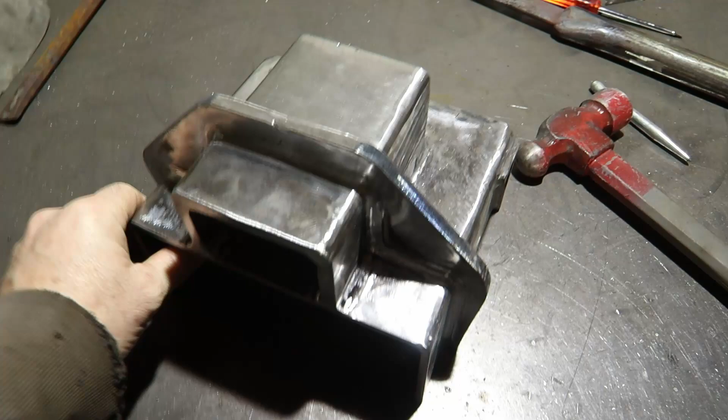In this video I will be making the bracket for the rear travel lug.

This one sits at the back end of the sled and it's also originally a cast part, but this will be made from sheet metal and welded, and I made it to look like a cast part.

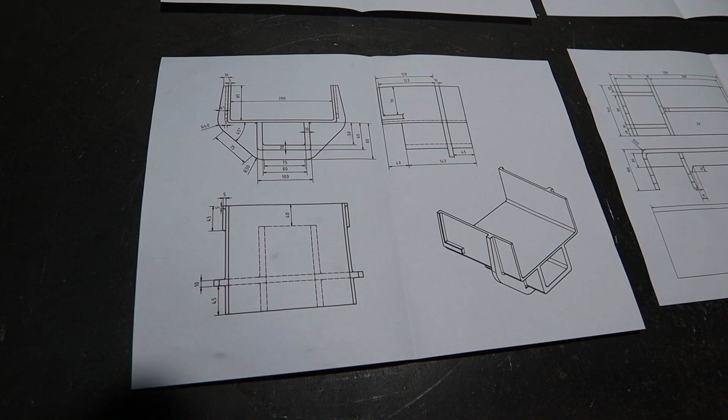I have selected the steel that I need for the parts.

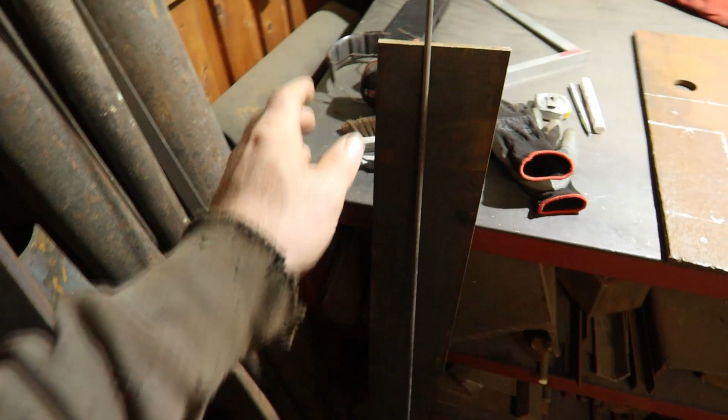This part, the flange here, I still need to make a drawing for it, scale 1:1, and I can glue it on this sheet and cut it out because it's more difficult to draw up. For the rest I have put a number on here, number 4. This is for drawing number 2. We have several parts drawn up now.

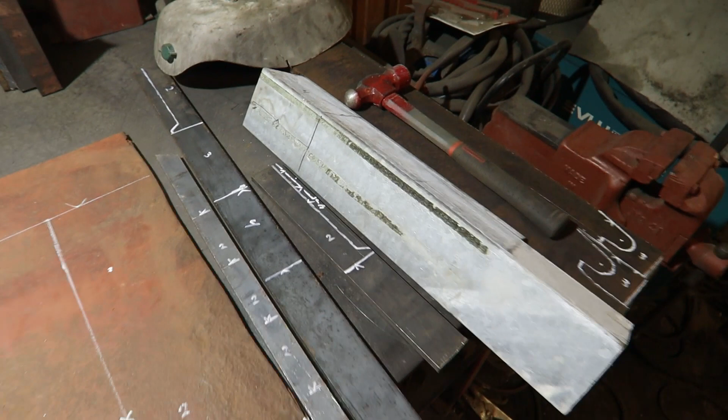This is galvanized, so it has a zinc coating, which I really need to take off because it's poisonous when welding, and also the welds will not be great.

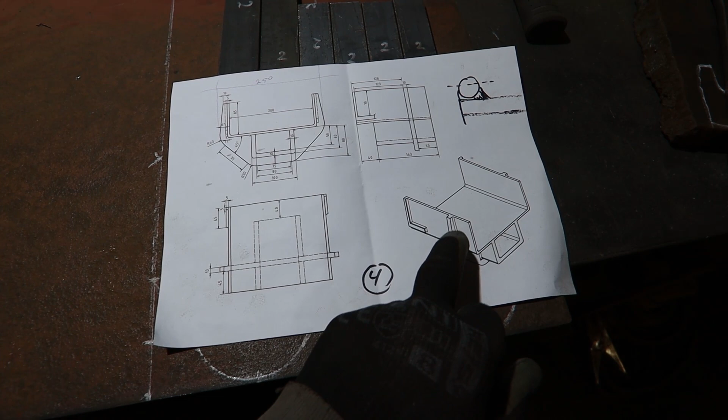For this part I'm going to make this one right now, already cut it out, but you can use a brake press to bend this sheet. Another option for bending is cutting slots in it almost all the way through and then just bending it over.

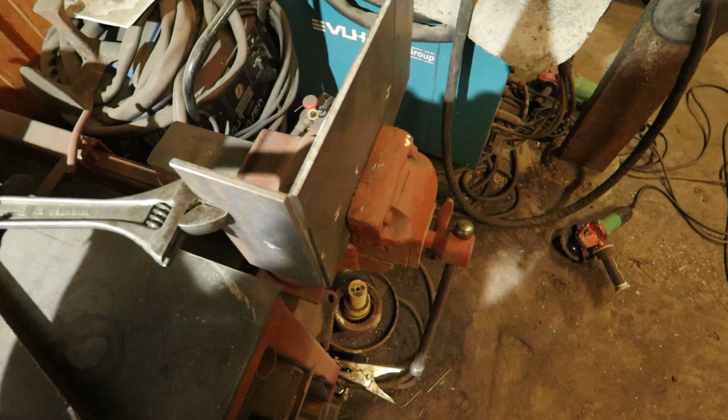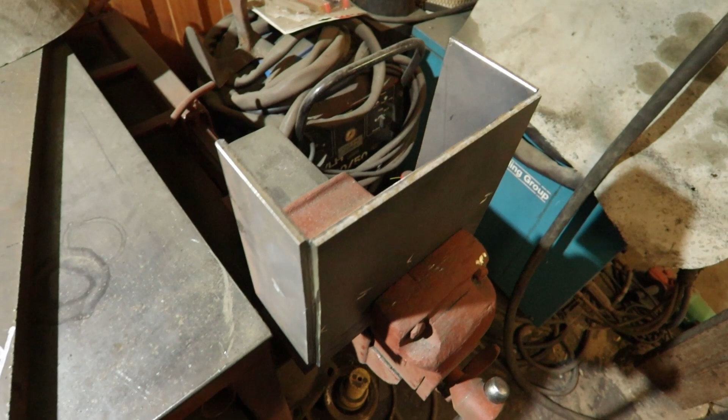Then I can weld the outside corners as well as the inside, because the inside has a little radius. It's over there, so we can use the weld seam to make that radius.

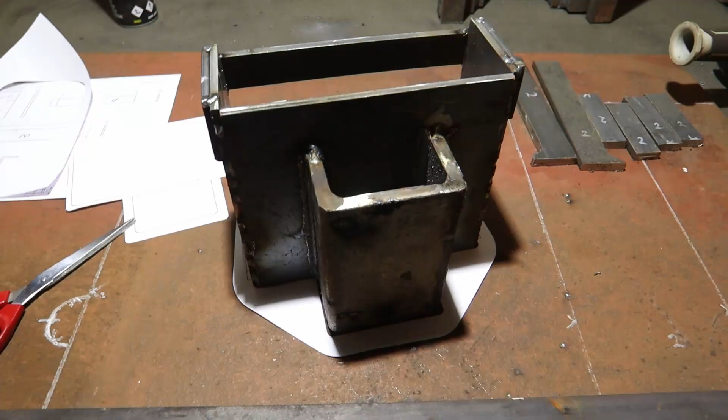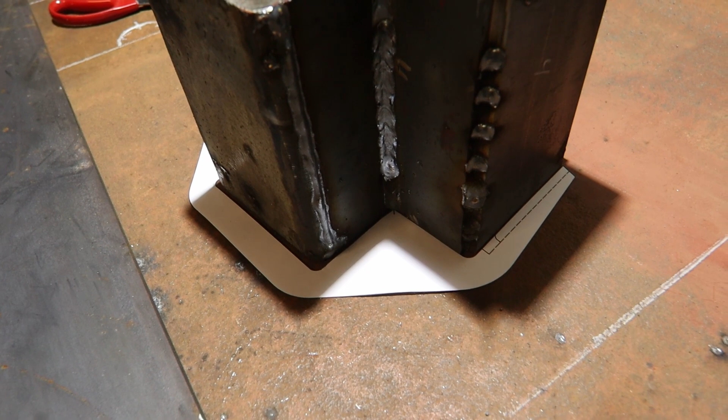For this part I made a paper cutout. Through the shade it's a bit tricky to see, but you can see it fits pretty good. I'm going to use it on a sheet of steel now and cut it out to finish this part.

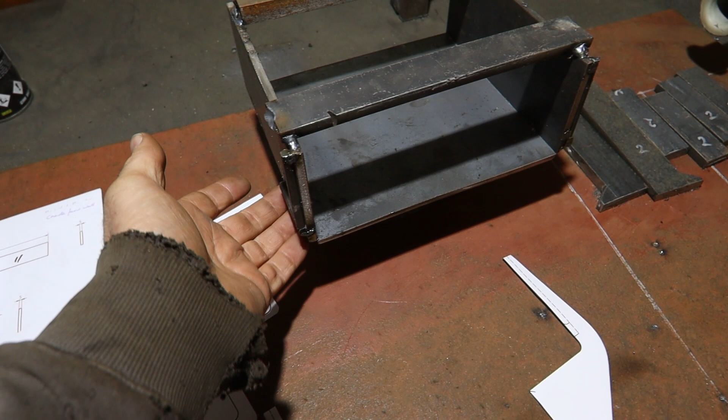On top I've placed some extra pieces of steel, some strips, for warping. When I weld this side and the inside, it's going to warp. So to prevent that, extra strips on top, and when it's cooled down I can cut it off.

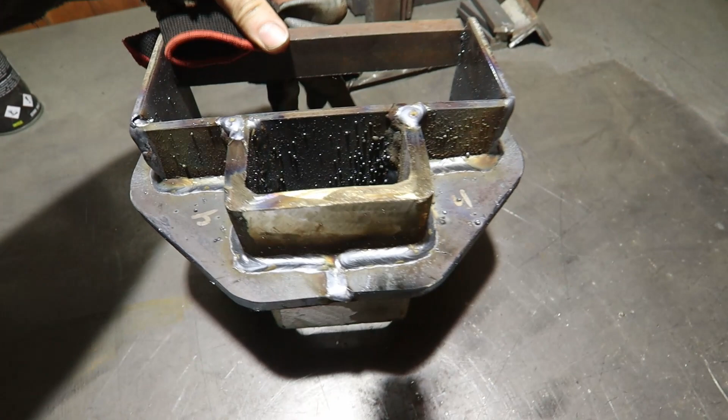This part is almost done, still hot from welding. After it's cooled down I can take off the two braces and clean it up.

All the welds have to be ground down like it's a cast part. You can see a lot of splatter on it, and that has to do with the surface of the metal - there's a thin layer of slag on it, and if you don't clean it off you get more splatter. But I have to grind it anyway, so I didn't bother.

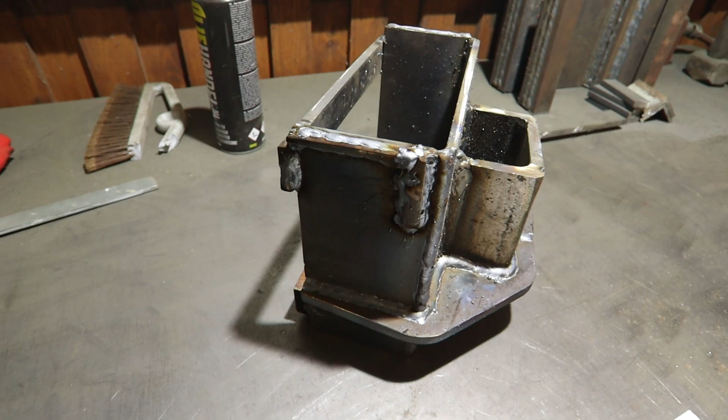Got this part ready now. In the corners I used a die grinder for the welding seams to be rounded so that it looks more like a casting.

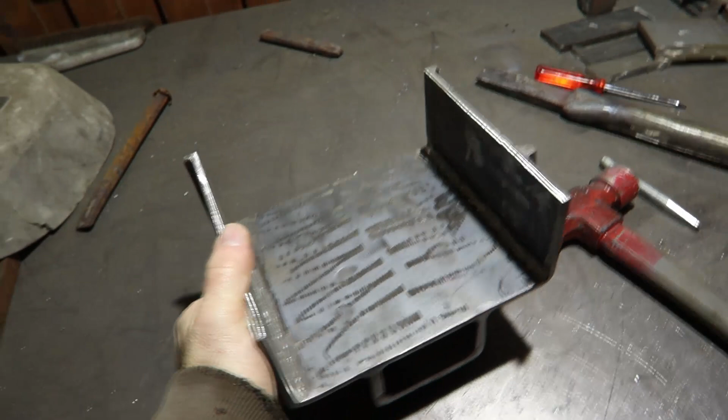This part will sit like this at the end of the underside of the sled for the gun, and this slot will be used for locking the gun in place for traveling.

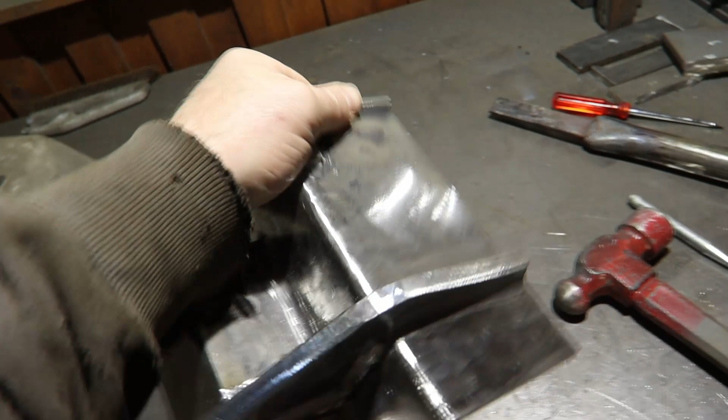The only thing I still need to do is paint it, and then there are some small edges that I need maybe body filler in to completely let it disappear that it is a welding seam. Then I can rivet it in place, and it is attached with holes on the side, but I still need to measure those.

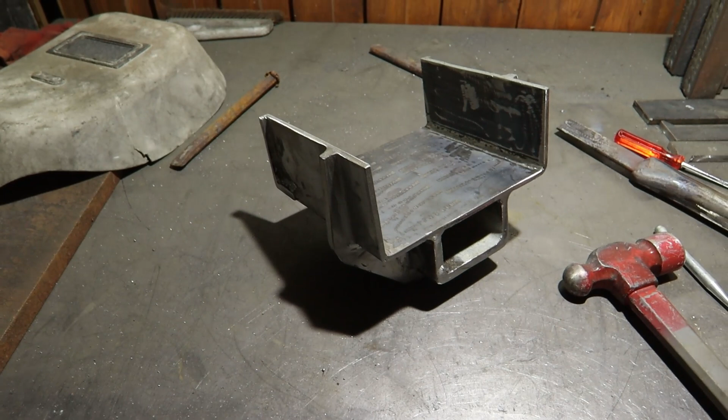We had the measurements, but the book with those measurements got lost in the fire, so we have to redo them. But that's not a real problem, we need to go there anyway.